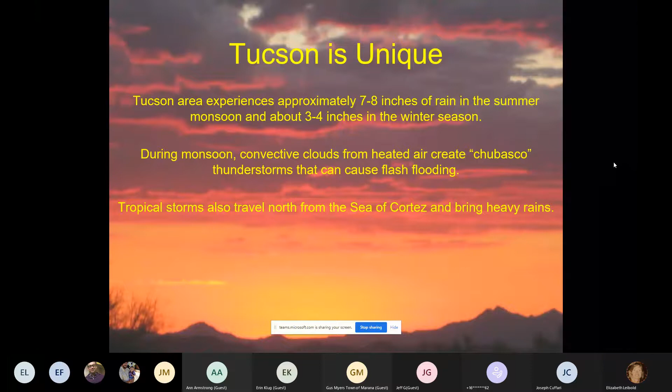Flooding is an excess of water on the land that's normally dry, affecting 2 or more acres of land or 2 or more properties.

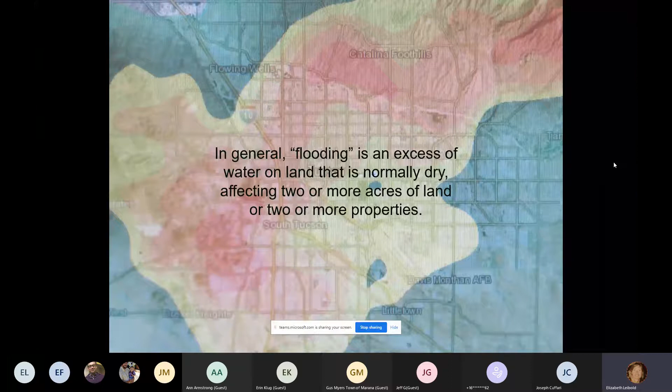Some of the different types of hazards that occur in our area can include all-weather access issues, clogging of our storm drain systems that can lead to blockages, obstruction, and diversion of flow. We also see quite a few swiftwater rescues, and there's concerns about stormwater quality.

Encroachment is an issue when there's too much development in an area and floodwaters are pushed to the side or water surface elevations are elevated.

We also have flash flooding conditions, quite a few reports of flooding in homes and other businesses. Lightning can cause fires and also cause problems with utility poles, and this can lead to loss of service or temporary energy loss.

We also have issues with ponding waters, and we try to avoid mosquito-borne illnesses by using detention systems rather than retention.

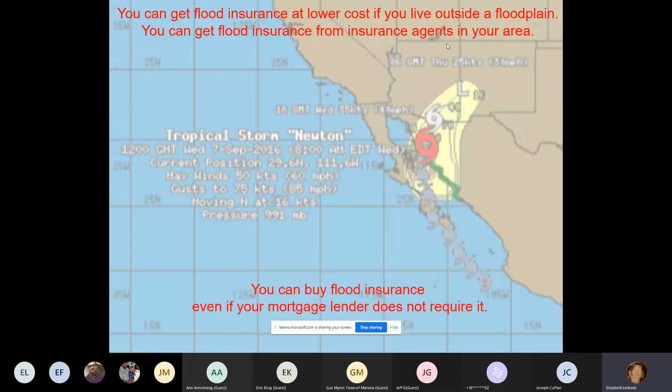There are generally two types of floodplain areas that are regulated. The FEMA, or special flood hazard areas, are mapped on those FEMA maps. The local jurisdictions may also have local regulatory flood zone areas that are mapped.

You can talk to your flood insurance agent to get a quote on what your flood insurance policy might look like. Please check with your local city engineering staff to check your flood status and understand the different hazards, such as erosion hazards and your flood zone.

Other information can include rebates on water harvesting systems. Always remember that new walls and fences do require a permit.

It is important to get a permit for a wall or fence because these structures may need wall openings to make sure that the fence is elevated above the 100-year flood zone to allow conveyance of floodwaters. Otherwise, your fence or wall could divert flow, and you don't want to be liable to that type of hazard.

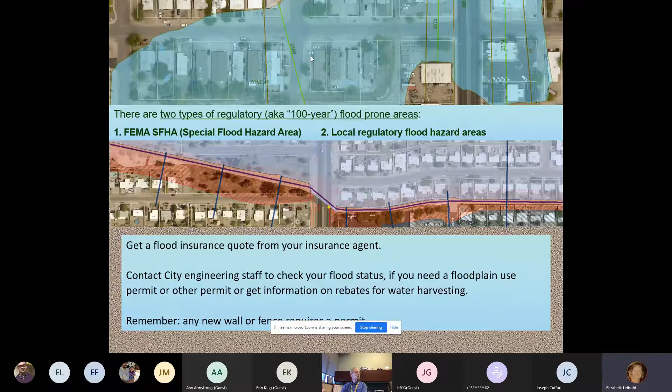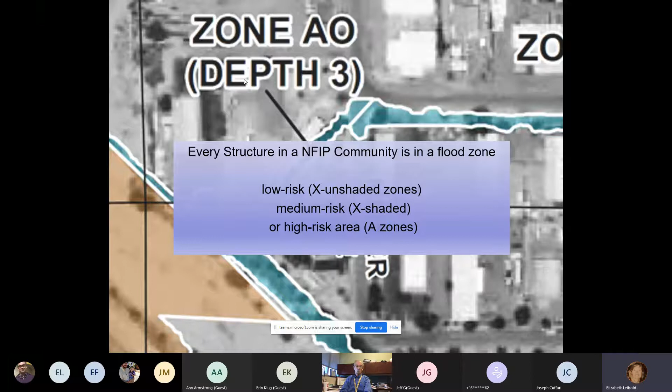The different types of flood zones are low risk, or X unshaded zones on the FEMA maps, medium risk, those are the X shaded areas, and A zones, which are high risk areas. In the city of Tucson, we have floodways that are the highest and most restrictive types of flood zones.

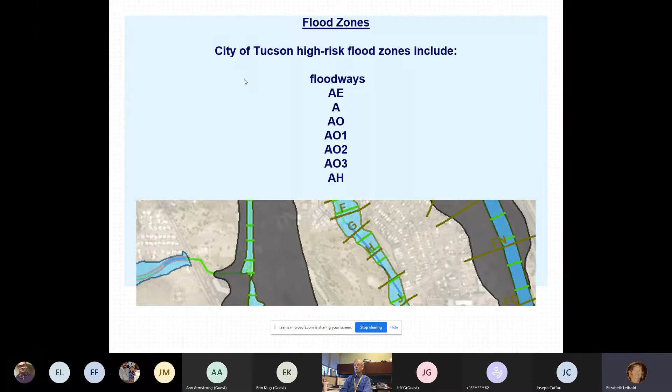And then there's also AE zones, A zones, AO1, AO3, and AH. These are different types of flood zones for ponding or other high-risk areas. The city of Tucson low-risk zones include the X unshaded and 500-year flood zones.

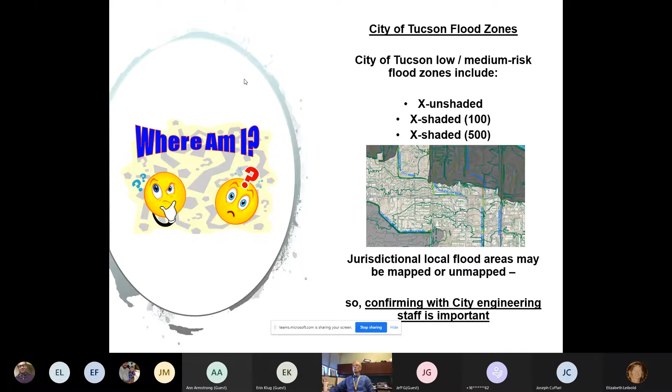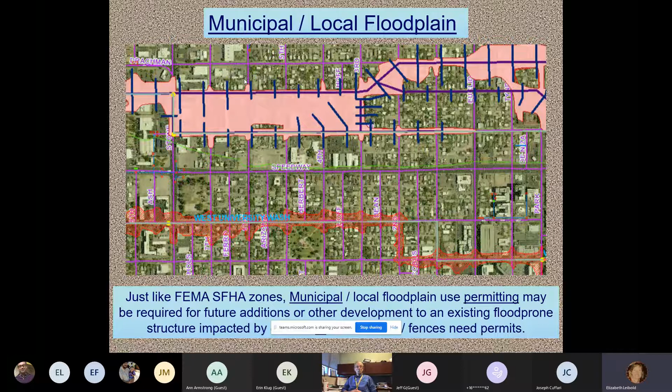Check with your staff on the type of flood zone that you might be within. Municipal floodplain use permitting is required for local and FEMA floodplain development, so please make sure you're checking with staff. Remember, fences and walls need permits.

For local floodplain considerations, sudden storms can occur anywhere in the city of Tucson. Municipal and local flood areas may not require flood insurance, but could still be at risk. Over a third of the policies in the city of Tucson are actually not in the high-risk FEMA flood zone,

but in the X zones, as some property owners choose to purchase flood insurance, even though flood insurance is only required when there's a federally backed loan for the mortgage of the structure from the lender. The lender will require proof of flood insurance if you're in those high-risk flood zones.

The community does various activities to help reduce risk. They may have floodplain ordinances that are updated. These ordinances include restrictions that limit and prohibit certain types of development in flood-prone areas. If we lessen the amount of development in the flood zone, then the community has less risk.

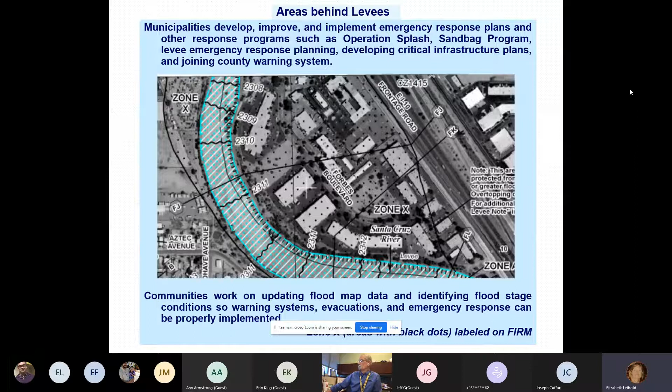We work to update our flood map data so we can identify flood stage conditions. So when there's a flood condition, warning systems can provide information on how to evacuate, and it also assists with emergency response.

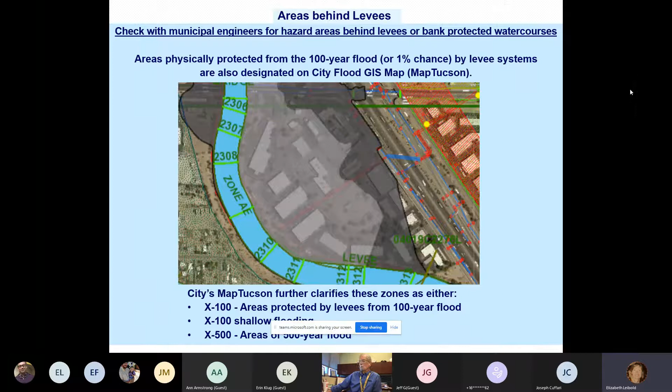I think we've gone over this. We're talking about the different types of X zones. There's 500-year flood zones that are restricted for critical infrastructure, as well as 100-year zones. There's shallow flooding conditions under 1 foot of depth, and there's also areas protected by levees.

There's other things that the city does to help reduce flood risk. We have a sandbag program, Operation Splash, where the city puts up barricades at dip crossings. And as mentioned, we have critical infrastructure planning underway.

There's also opportunities for flood disaster monies, funding, as well as applying for pre-flood or mitigation grants. The city is actively applying for those grants.

Keep in mind that if you keep your area clear around your building structure, it will help reduce the amount of fuel for fires that could be started from lightning. You can sign up for that alert system at myalerts.pima.gov.

This is just a photo of the Rillito in 2006. And then I wanted to talk a little bit about the history of the National Flood Insurance Program.

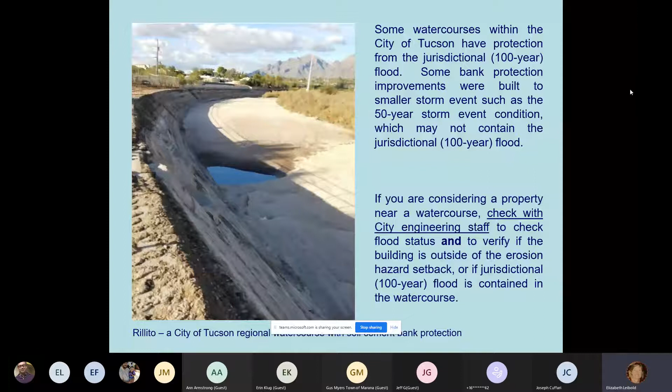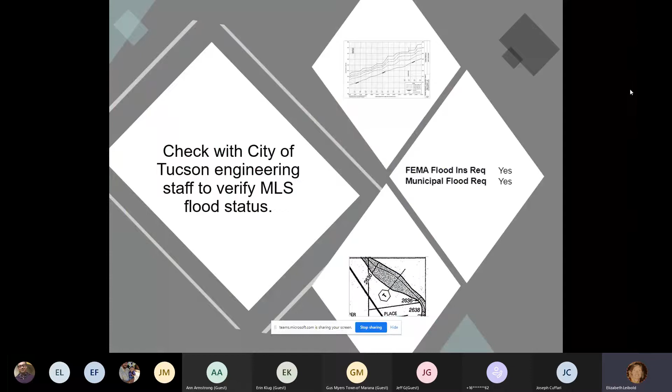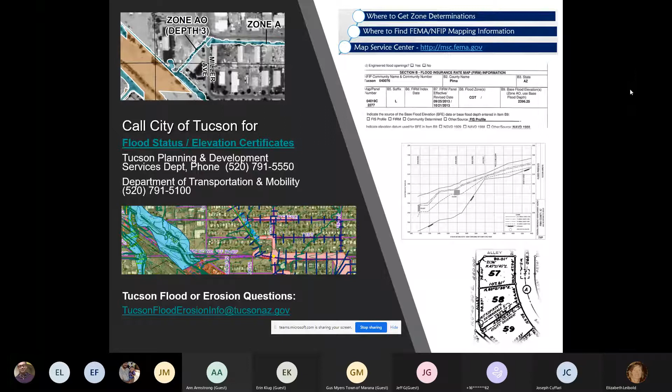MLS has information about flood insurance and municipal flood requirements. And the city of Tucson has contact information, provides information on final plats that might have drainage easement information. We also have FEMA flood insurance study reporting that provides various water surface elevation to 100-year and 500-year elevations. We might have elevation certificates, and we should have all elevation certificates, and of course, flood status information. You can look up this information at City of Tucson, PDSD, Planning and Development Services Department, floodplain information.

Elevation certificate requests can be made by sending in a self-addressed stamped envelope. You can find this information again at City of Tucson, floodplain information.

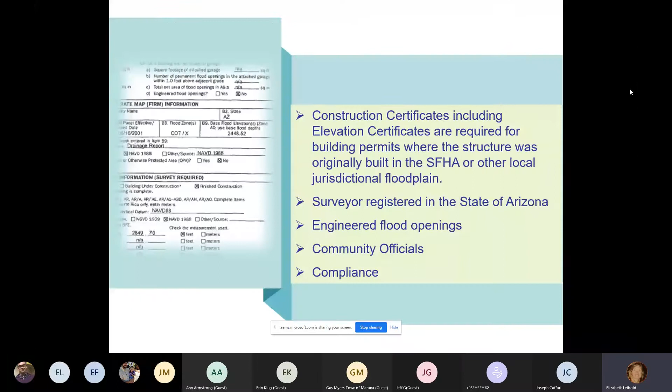Keep in mind that post-fire conditions can cause sediment transport that can take away conveyance area of floodwaters and change conveyance and floodplain mapping. The Pima County Flood Control District has a website where you can look at some projected new floodplain data from the recent fires in the Catalina Mountains.

A 30-day waiting period exception may apply, meaning that the 30-day waiting period is not required like typical flood insurance policies. However, keep in mind that the fire must be declared completed or contained before the flood insurance policy can be used. So even though the 30-day waiting period may not apply to those post-fire conditions, the fire must be in contained status.

More information can be seen at City of Tucson Floodplain Administration. This PowerPoint will be made available later for your reference so you can look up these links.

I now have Town of Marana floodplain information, and I'm going to bring up that PowerPoint for you. Let's go to the third page and I'll start from there. Good evening, my name is Gus Myers.

I'm the Development Engineering Manager for the Town of Marana, and I'm also the interim flood CRS representative for the town. This slide shows our phone number and email. We provide floodplain information to realtors, the general public, and contractors. We perform floodplain status checks for realtors and others who want to know what type of floodplain their property is in. We review construction in the floodplain and handle permitting for floodplain use permits and elevation certificates. Our department also provides technical assistance to the general community and to our other departments.

For planning and building in the floodplain, we know that flooding is a natural occurrence, and we ask that you contact the Development Engineering Division to start talking to us about your project, where it is, and what you want to do, so we can start providing guidance.

If you're going to build in the floodplain or in the erosion hazard setback, the Town of Marana will require you to apply for a floodplain use permit. If it's a habitable structure, we will also require an elevation certificate once you're underway. Construction in the floodplain is covered under the town code, which you can find at maranaaz.gov by clicking on engineering, which takes you to development engineering, and under that, floodplain.

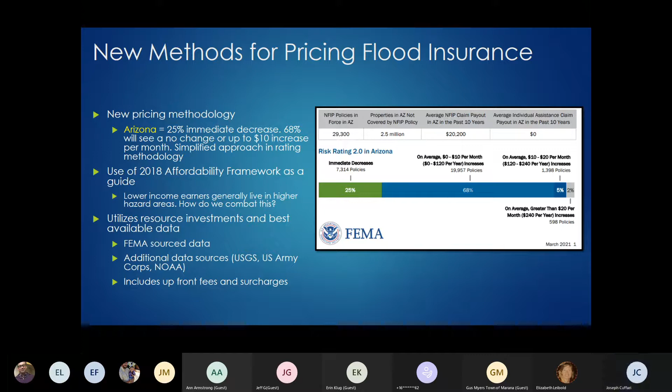We're not going to go through all of this, so don't be scared. But David Bowie is talking about changes. So what is changing under this new premium system?

It's really tailored to help the insurance agents, so it wants to simplify that quote process. Let's get that flood insurance quote to the policyholder a lot quicker and a lot more effectively.

A big change, which we'll get into, is eliminating the mandatory requirement for elevation certificates. A huge change is expanding that CRS discount to all floodplains. Previously, you would only get that major discount if you were in a FEMA recognized floodplain, but now this expands that out to all parts of the jurisdiction. So that's 35% for Pima County, 20% discount for City of Tucson, 15% for Marana.

Replacement cost value is being taken into account. We know that floods only damage a certain number of feet of the house; rarely do you see a home get really washed away. So that replacement cost value, what it would cost to replace that portion of the home, is being taken into account instead of the full cash value of the structure. This kind of spreads the equity around, because if you live in a mansion and get damaged, you have to replace marble and quartz and some other stuff, whereas in a manufactured home it may only be wood and CMU piers and some concrete. So looking at that cost differential and that replacement cost value.

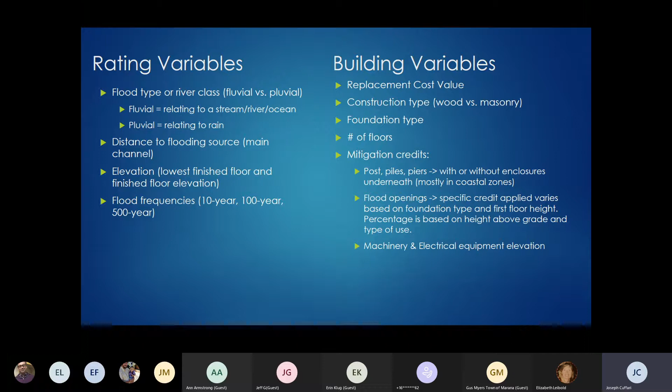For the building variables, we talked about that replacement cost value. Looking at the construction type, wood versus masonry, there's two different costs for those replacements. And then the foundation type, which we'll get into a little bit. Do you have any mitigation credits? Are your machinery and electrical equipment elevated to a certain elevation? Do you have flood openings to allow for water to pass through so it doesn't get inundated? You get some credits based off of that.

For the data analysis, FEMA is using what's called CoreLogic. They're a private company that's been contracted with FEMA, and they essentially use computers - it's all in the computer these days - to determine what your finished floor elevation is related to that flooding source. As a floodplain manager, we've been asking FEMA to get some information from CoreLogic. We're told that information is not available right now for testing, but it's something we're actively looking into.

Let's talk a little bit about this elevation certificate. Previously, you would have been required to submit an elevation certificate to show that finished floor elevation. Now, CoreLogic is replacing that step. You can still submit an elevation certificate to help refine CoreLogic's models. The good thing is that you will not get punished for doing so - if you provide that elevation certificate and actually get a higher premium, you can still go back to that lower premium from CoreLogic. So it really doesn't hurt to get that elevation certificate. And as Gus and Elizabeth stated, reach out to the jurisdiction - we may have one on file, or we can help you get one.

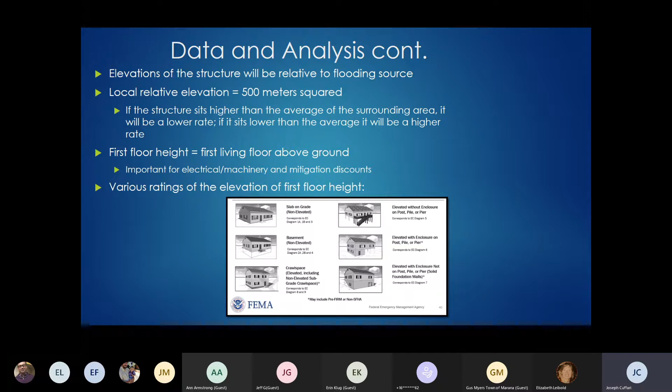There's various ratings for first floor height. In Arizona, we don't see too much of these. What we're primarily looking at is slab on grade, a basement, or a crawl space if you have a manufactured home. Those other situations really are what we're seeing on coastal communities, the New Jerseys, Florida, California areas. So just some examples of the first floor heights there.

Like I mentioned before, and in talking with our FEMA representative, this really seems to be the driving force for flood insurance pricing: the elevation of the structure related to the flooding source, the distance to the flooding source, and the replacement cost value. That flooding source is based on the National Hydrography Data Set version 2+, which I'll show you in a second. So that's what FEMA is using to get their information.

For floodplain management purposes, there's what's called a letter of map revision and letter of map amendment. Essentially, that is a way for homeowners to prove that their property sits higher and outside of the floodplain. Think of it as an island in the ocean, one of those desert islands out there. What that does for flood insurance pricing is it gets you out of that mandatory requirement, which is a good thing if you don't want flood insurance.

But the risk is still there, so you may still be rated at a premium as if your house was still in that floodplain. It's a little confusing to explain, but that letter of map revision can get you out of the mandatory purchase requirement. So what you may spend in building costs and hiring an engineer to prove you're not in the floodplain could potentially be saved in that flood insurance.

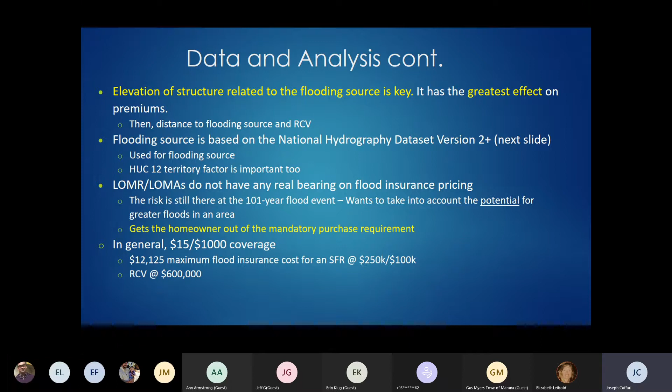In general, flood insurance costs about $15 per $1,000 of coverage. If you own a $30 million mansion, I think the maximum amount of insurance you could pay is $12,125 if you maxed everything out. So I just thought that was a fun little fact to put in there.

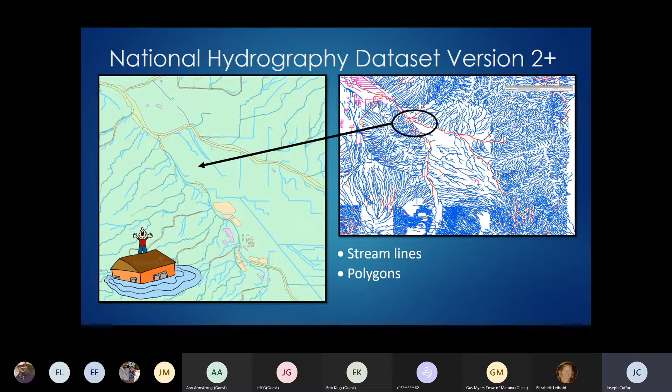We talked about that CRS credit. I can only speak to Pima County specifically, but Pima County just went to a Class 3 community, which is a huge deal. It puts us in the top 1% of the nation. We got a lot of points from doing presentations like this to you all, so thank you for attending. Because of that rating modification, we went to a 35% reduction — we previously had 25%. We're estimating that's going to save about $1 million in flood insurance costs for Pima County residents because of that and because of the risk rating impacts on our community.

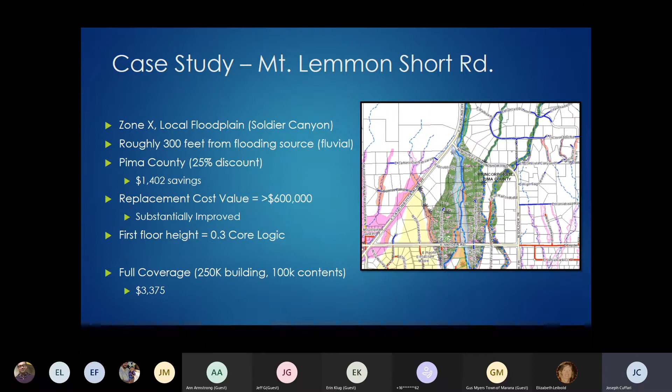They're rated at over $600,000 for their replacement cost value. CoreLogic gave them a first floor height of 0.3, which we feel is fairly accurate. Again, this was built prior to floodplain regulations, so an older home. This one is within the city of Tucson, located next to the Rillito River and Swan Road, so a pretty urban area.

This is really the one that kind of drove a lot of the questions that we had and why we reached out to our FEMA representative. This one is in a bank protected area, so they're not required to get flood insurance. If the Rillito River were to overflow, they may be impacted by this Zone X shaded floodplain. It's a low hazard area, just a normal subdivision house.

They were rated at almost $5,000. We were kind of taken aback by this. And in talking with FEMA and our representative, we now kind of understand why it's rated this high. Again, it's that distance to the flooding source, and then their elevation above that flooding source.

This is what it is. Bank protection, which we have all throughout Pima County, is not taken into account currently. That's a major sticking point and something that we really want to get changed at the federal level. This homeowner says that, rightly so, he's not going to renew his flood insurance policy. He went from about $300 up to $5,000. Not going to happen. So just an example there.

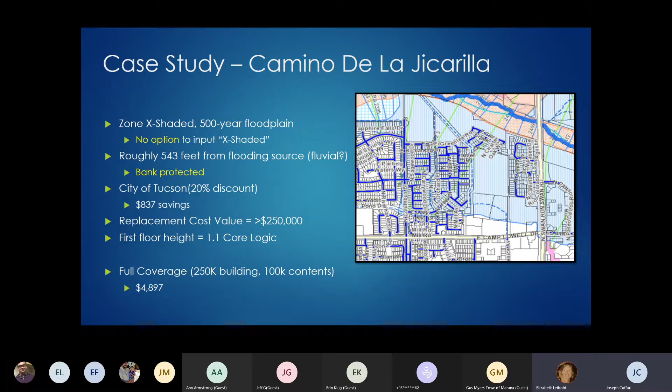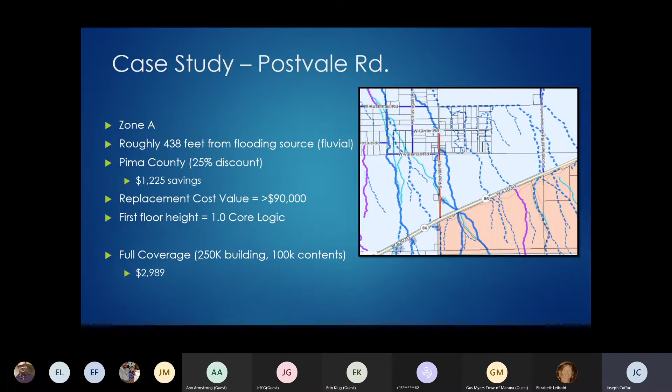This is a manufactured home, Zone A floodplain, kind of the southwest portion of the area. They're rated at about $3,000 for that. Again, we were taken aback, but then looking at the issues, that distance to the flooding source, 438 feet, is pretty close. They could expect to be impacted.

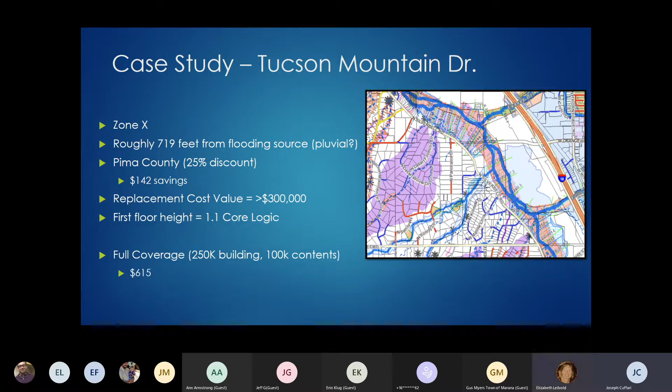Here's one where I wanted to show one that's definitely outside of the flood hazards. Their full cost would be $615. But they're still not going to get flood insurance because they sit a lot higher than any of the nearest flooding sources.

So we reached out to FEMA, and they were very gracious and provided some answers. That reserve fund assessment is what's called a catastrophic flood event reserve fund. So essentially, the way we understand it, and not to be pessimistic about it, but it's one of those things where Arizona residents are paying for catastrophic events on East Coast communities. Whether that's equitable or not, that's not really our determination to call, but it's something that's kind of sticking out to us that we want to fight for our residents for.

And then, like we talked about, what is the distance to the flooding source? We got that information that we've talked about so far here.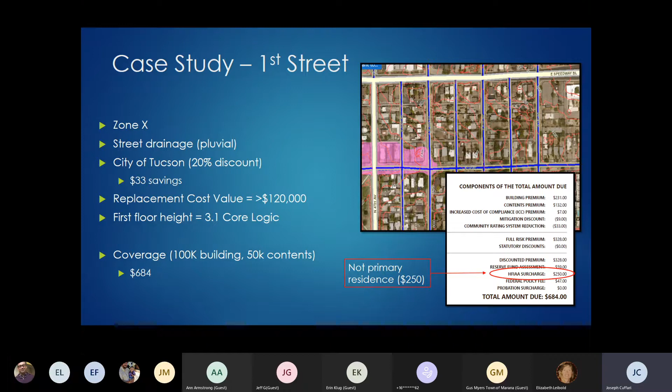This residence is owned by someone in our office, and we went out there with him. We went to the property and measured, and it came in at about 3 feet. So we're happy with what CoreLogic is putting out so far.

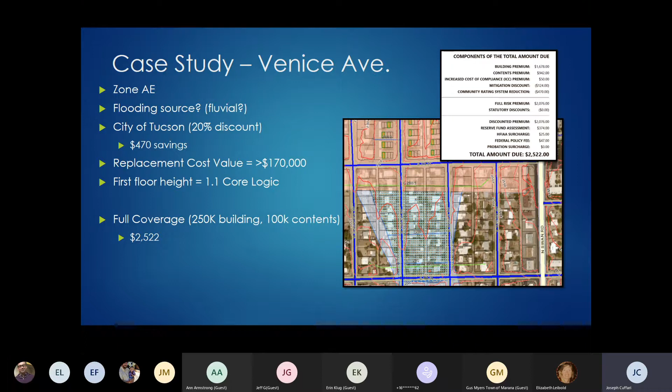Another example, this is a Zone AE, so it's a special flood hazard area. The cost for this is $2,500. What I wanted to show with this is that the property owner actually had an elevation certificate that she had gotten done a couple years ago. The elevation certificate showed that she is actually below the floodplain.

She just renewed her policy in February 2022, and it was reduced about $1,000 from her previous quote. We don't exactly know why. This is with USAA, the bank who's writing the policy, so we can't get too much information from them.

But she's kind of happy. So her full coverage was $2,500 as the quote, and then she's getting about $1,000 off. So good on her for that.